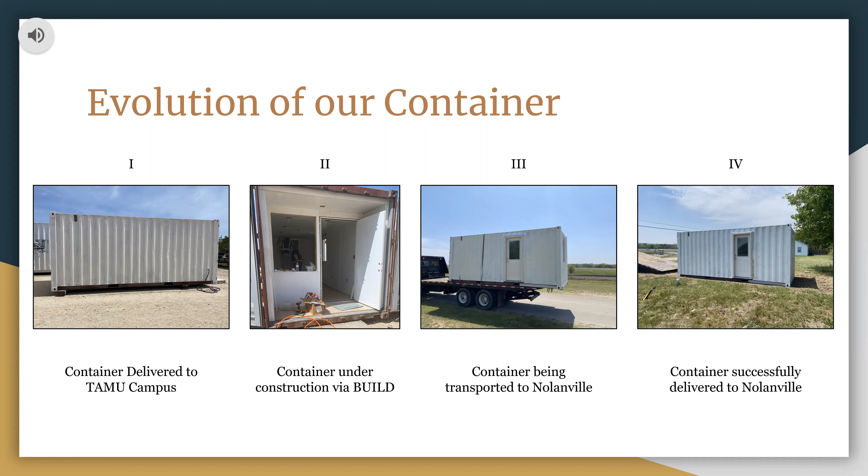Displayed below are a few different images of our actual container in different stages of its development. Going from left to right, we see where the container was originally delivered to Texas A&M campus earlier this semester. We then handed it off to Build Services, where the container went under construction and made the necessary changes for our project's vision. Third step was the container being transported to Nolanville, and the last step, which happened in this most recent week, the container was successfully delivered to Nolanville.

Going into this project, the goal for the planners was to find a way to incorporate a unique and distinguishable character into our project that would create a friendly and reliable identity within the Nolanville community. We aimed at doing this by gathering a few different case studies to take inspiration from and also incorporate their central themes in our own way.

The first one was Parque de las Palapas, which encompassed the idea of a centrally located hub serving as an entertainment district and a feeling of home away from home within its own community.

Secondly, we used Hangers Cleaners, which showcased the power of small business by adapting to local culture and establishing personality within the community, making them feel like they have a sense of belonging and bringing them tighter with its own community members.

The third and final one was the Flophouze Hotel, which was truly a sustainable development that operated out of containers similar to our project and also used recycled materials that gave it an environmental advantage and also an aesthetic appeal, something that we are also aiming for within our own project.

The master plan for this site creates a plan for the city to reference and utilize moving forward while developing their economic district with the standards now set through the Catalyst project.

The design allows for future container layouts on adjacent properties to allow for cohesive design, as well as implementing a pedestrian-focused street, allowing people to safely and freely move throughout the space.

The plan also utilizes the southern property currently owned by BNSF Railways, with the hope of creating an open play space as well as implementing a walking trail and play area or park for families and children to experience.

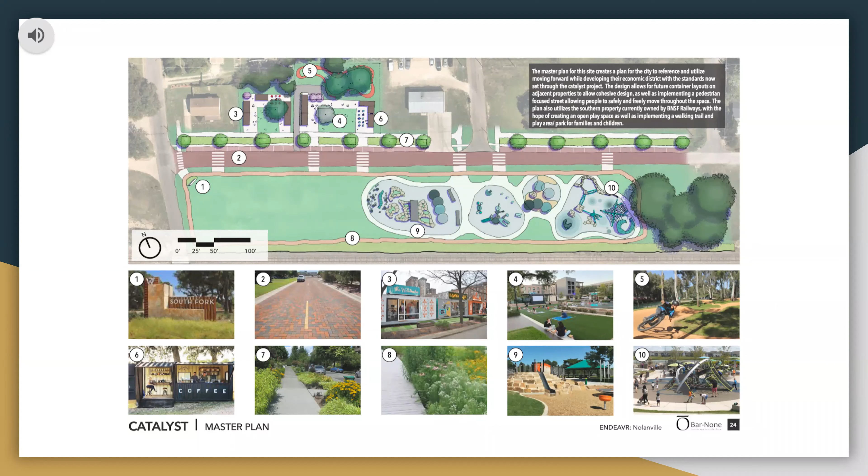We've created 3 different site orientations. Option 1: the containers frame the edge of this space with a large central green, helping to create a sense of place. In the rear is a bermed pump park.

Option 2: the containers are oriented to the left-hand side of the site, leaving room on the right for future development. Located in the rear is a symmetrical bermed pump park.

Option 3: the containers are also oriented to the left-hand side of this site, leaving room for development on the right. This option includes a drive-through for the coffee shop. Also located in the rear of the site is a larger bermed pump park.

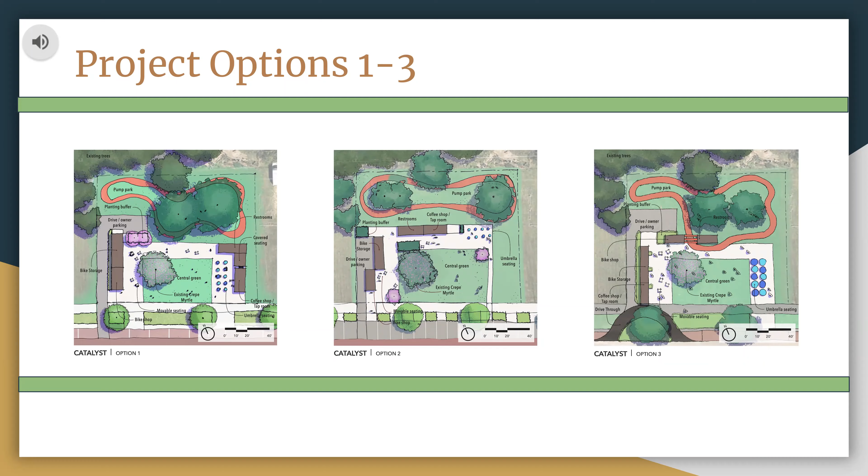Option 1 Perspectives.

Option 2 Perspectives.

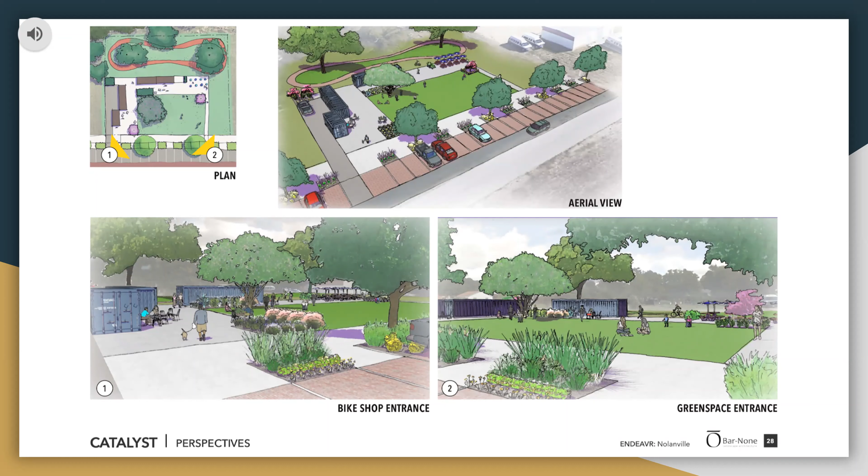Option 3 Perspectives.

Part of our team's objective was constructing a model that could prove or disprove solar feasibility, which is to say whether or not it would be advantageous or even possible to implement solar panels in order to collect solar energy production and convert it into usable energy for the container.

This was done by training a regression model that used data from a previous study to predict the power generated by solar panels on a given day, taking into account weather and seasonal conditions. The model takes as inputs humidity, ambient temperature, wind speed, pressure, and visibility, and gives as output the expected power generation on an up to hourly basis, which allows us to understand whether the solar energy plan is feasible, at what times it would be most effective, and whether we'd want to fall back to an alternative plan during times it's not as effective.

Using a data set from a previous study on forecasting solar energy, we trained two different models: a linear regression model and a random forest regression model. After that, we collected weather test data from Fort Hood, a military base around 7 miles west of Nolanville, since there was no weather station data for Nolanville itself.

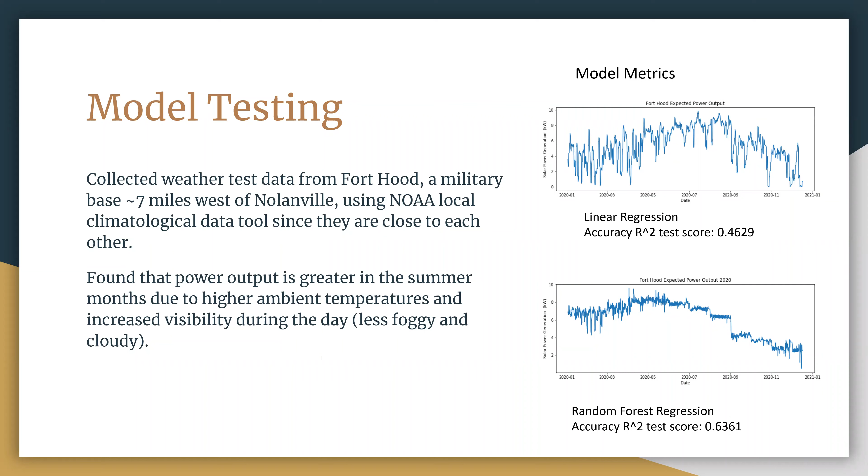After we completed testing our model, we extrapolated the outputted energy data to the average cost of energy per kilowatt hour to look at how much money could be saved.

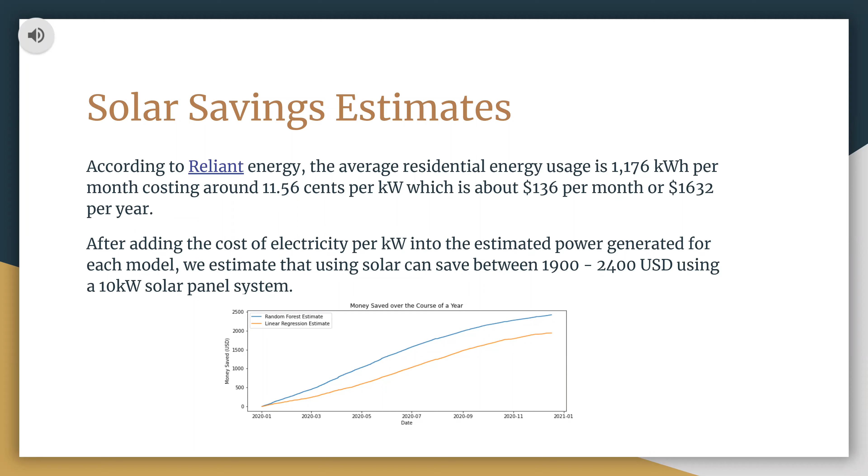According to Reliant Energy, the average residential energy usage is 1,176 kilowatt hours per month, which costs 11.56 cents per kilowatt - about $136 per month or $1,632 per year. When taking the cost of electricity into account, we estimate that solar energy can save between $1,900 to $2,400 US per year when using a 10 kilowatt solar panel system.

Using this, we will create a sidebar detailing the overall benefits the development and the clients may receive from this installation.

In another topic, we have taken into consideration implementing plants directly into our design, such as including a vegetated roof onto our shipping containers. After a conversation with LiveRoof Texas, more logistics will have to be researched as the containers cannot typically handle their structural requirements.

To the right, you can see an example of a project that LiveRoof Texas has already worked on, a shipping container, which ultimately did not have the structural capacity to completely bear the vegetated roof.

So another alternative could be to use the face of a container and implement a green wall, such as vines running down on it. This design, however, is high maintenance and would require regular care.

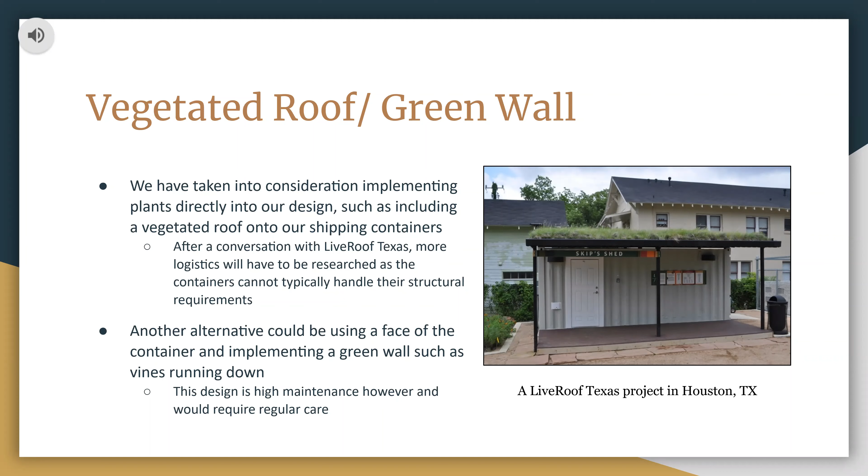Our mission is to ultimately create a framework in which other small towns looking to revitalize may adopt the same principles. Therefore, we have decided to create two forms of attaining a community profile and creating an accessible format for these towns. One of them is a community survey.

On the other hand, we are also planning on implementing a comprehensive plan. By the end of the project, we are to create a comprehensive plan that includes the main vision of the project, the survey results, the conceptual plans, the solar energy information, and specifications utilized for the shipping containers.

Looking into the future, we have various aspects of design, sustainability, and planning ahead of us that we are all very excited for. On our design side, we have found an artist interested in adding exterior wall art to our container next. Sustainability speaking, we are continuing to explore our solar panel options and may even be installing on a shading structure in the near future.

As far as our planning goes, we are currently working on a comprehensive plan that will detail the projection for the container site in the years to come, as well as future businesses or amenities that could be integrated into the subject area.